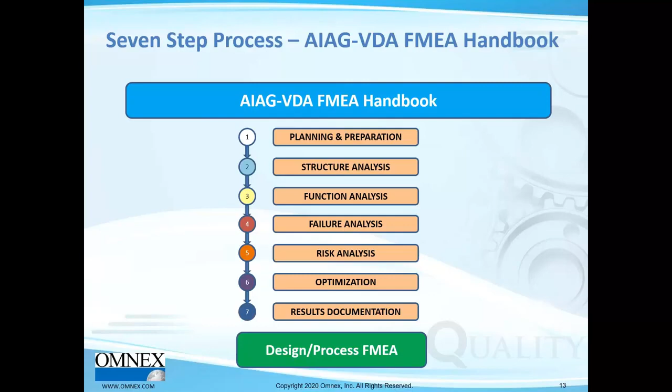And this is the form. The only point I want to make here is that the AIAG VDA is very different from the 4th edition because it connects up the higher level system with something called the focus element, which is in the middle of these threes.

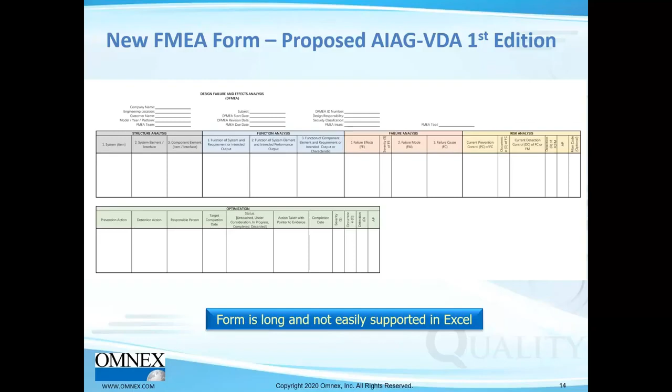You can see colored things here for structure analysis, function analysis, failure analysis. The focus always is on the element in the middle, that system element. The higher level element here is your customer's system, and the lower level element is the component from your supplier. That's an assumption the AIAG VDA makes. Keep that in mind as I talk about this later.

This is the 7-step process with planning, structure analysis, which is the BOM laid out. I always like to remind viewers and listeners, the structure analysis is a very important step when you do 26262, when you do ASPICE, and when you do cybersecurity ISO 21434. The idea, we call it systems engineering, is laying out how the product breaks down. But keep in mind, as soon as you talk EV, AV, we're also talking about the system having hardware and software. Systems are very complicated in automotive - systems have subsystems, sometimes subsystems have sub-subsystems, and you might see software and hardware in multiple levels. It's not as trivialized as some of the examples we do for you.

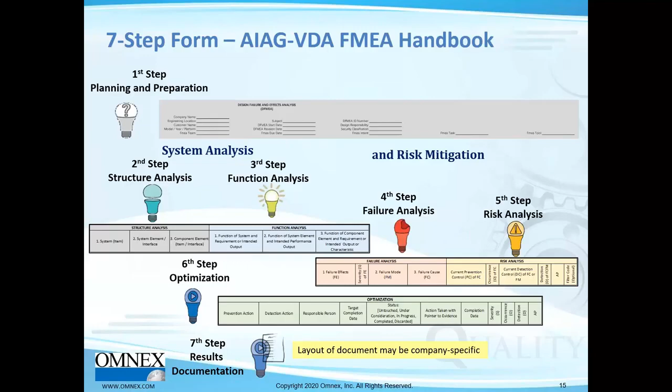And then your function analysis, the idea of functions. Of course, Omnex will say functions and requirements. We standardize to make sure when people do an ASPICE or 26262 or cybersecurity, when you do requirements, we always say do functions and requirements so it's easy to bring into the FMEA. I'll tell you more about that later.

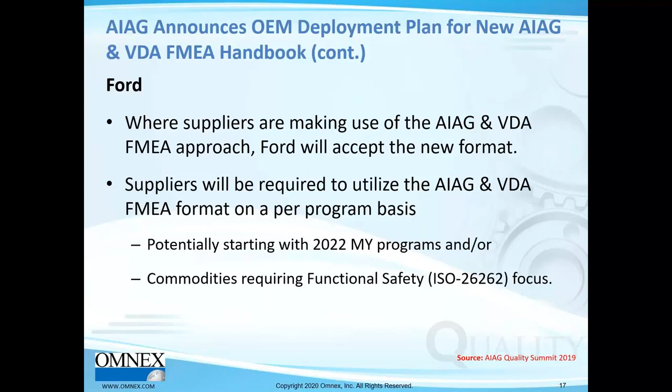General Motors says program starting in 2023, and Mike, that might be almost immediate, if I'm not mistaken. Is that right? Are you actually saying that maybe some DFMEAs have already been completed for 2023? They should be if we're talking about 3 to 4 years prior to a calendar year for the launch. So you'd want to check with GM to make sure what their requirement is for the FMEA.

I would say if you're working on anything that has to do with autonomous vehicles, that you're probably going to get pushed into the new AIAG VDA handbook format.

So I'll also just say the reason I asked Mike is Mr. FMEA, was Mr. FMEA in General Motors. In fact, Mike, would I be mistaken in saying you've even done probably a few hundred software FMEAs?

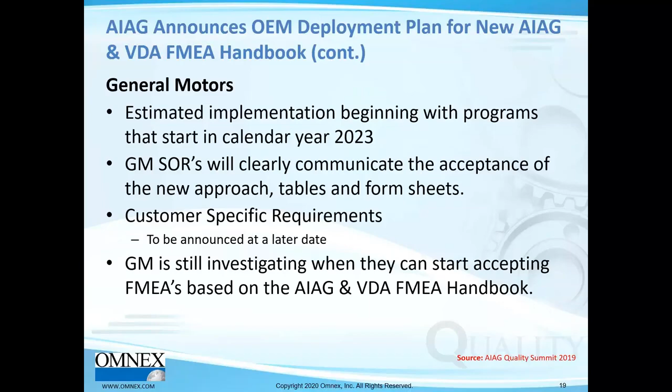You're welcome. So that is sort of the announcements coming from three of the big three and Honda, and just some comments from Omnex. Folks, we absolutely recommend and encourage you to use the AIAG VDA DFMEA. How it links the higher level elements to lower level elements and how you have functions and requirements flow down is an absolute requirement for functional safety.

ASPICE, and cybersecurity. So if you do the 4th edition, you will have to do it outside, using software programs like DOORS or Omnex's flow-down requirements, and then you'll have to transfer it back into the FMEA. So it's very important that you adopt the functions requirements approach in terms of even ASPICE's, what is SYS.2?

I have Nikhil here. Requirements, is requirements elicitation, or is that the one before? Anyway, yeah, one before.

So AIAG VDA FMEA, we have a modified 7-step approach, which I'll share with you in the next few slides. Make sure you use the modified approach so you can get the linkage for the V model.

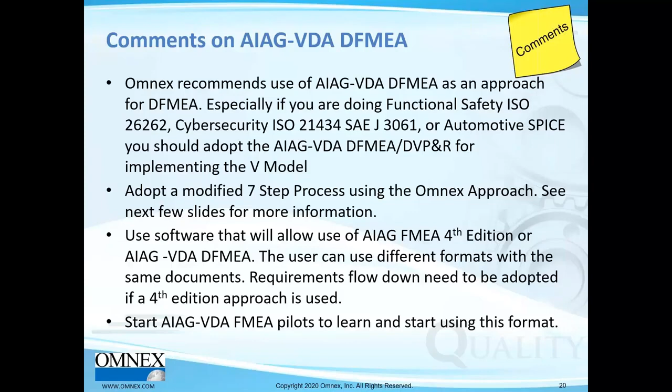All right, next I just want to tell you a little bit, if you don't know and if you're new to the idea of the engineering V, this is what is required, for example, in cybersecurity 26262 or ASPICE. Of course, I don't want to give you all kinds of detail, but this is also where we say, you got to integrate IATF 16949 APQP requirements with these 4.

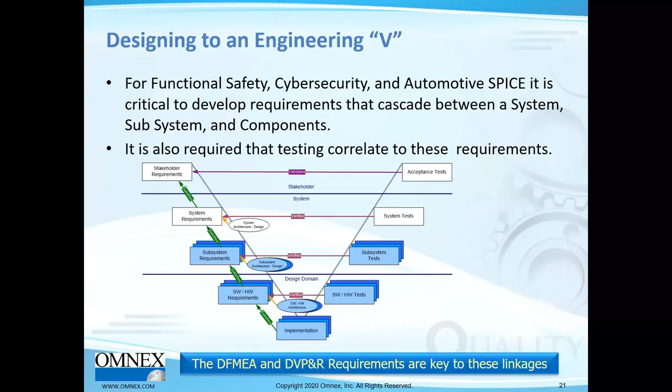But keep in mind, to do something like this, it's not easy if you don't do something like this. This is the engineering V, and a reminder for you, during the functional analysis step of the AIAG VDA, you need to do functions and requirements. Then these functions and requirements, you'll get design, of course you come up with design controls, and test detection methods. You'll have testing, and that transfers into the DVP&R, which is the testing requirements on the right-hand side, okay?

So your test plan or the DVP&R is inherently linked to your DFMEA, just like the PFMEA and the control plan are linked. So, for the longest time, I'll just mention this to you.

Yours truly came up with a linkage between process flow, PFMEA, and control plan in the 1980s. That's how we came up with AQuA Pro, our software, in 1988. We already had it linked. I don't quite remember if I had DFMEA linked at that point, but I spent many years.

I'll just say this, Greg Gruska, also part of Omnex, also came up with the linkage, and he worked with Ford's DCP. So I don't want to claim it just for myself. I spent many 10, 20 years preaching, nobody changed. And then, of course, finally everybody changed. Like that, folks, there's a link between DFMEA and DVP&R.

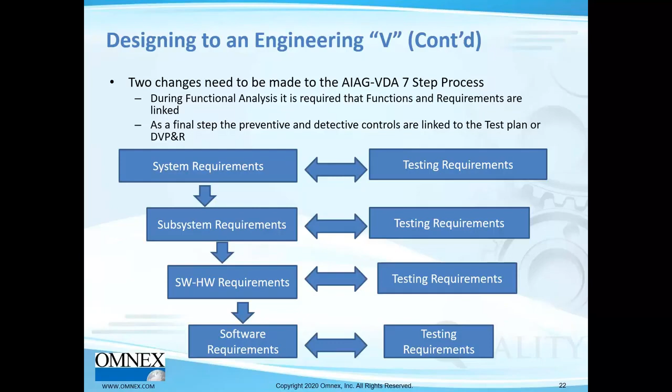Let me just go, I'm afraid to go page down and my arrows don't come. But you got to start at the lowest level of testing, and then you build up. So testing flow, requirements flow down and testing flow up.

This is the modified 7-step approach. You can see here the boundary block diagram, we say it's mandated. And of course, you do the structure analysis and the interface diagram in step 2.

Then in function analysis, functions and requirements is left optional in the handbook. We say functions and requirements, and you'll see later we say functions, requirements. Well, it's there, let me wait.

Then a very big, momentous key thought: because the AIAG VDA FMEA borrowed from the VDA FMEA, they always say the cause of the failure is at the right-hand side, which is at the lower level. So all causes go to your supplier. Customer does the DFMEA, it's the supplier's fault. When the supplier does a DFMEA, it's their supplier's fault.

So causes flow down. One of the things the US methodology is always focused on is the focus level - what can we impact? We can impact our design the most. So Omnex wants to caution: first work on the focus level, which is our product, before we look at causes at the lower level. Look at both.

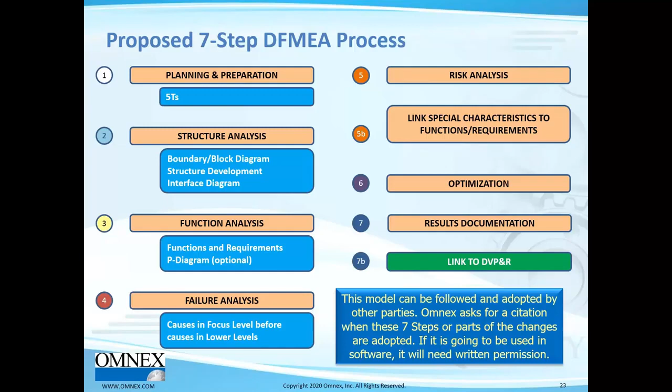Then, of course, you have optimization, results documentation, and you see the 7B that we added in, which is the link to the DVP&R, which is very important. So we recommend you use the Omnex 7-step approach. This model can be followed, adopted. We just say, in my old age, I'd like to get a little credit to use what we develop. Just cite us if you're going to use us in papers and things like that, or presentations.

All right, how about PFMEA? PFMEA, we believe the U.S. does the best in PFMEAs. And we have gotten very close to zero defects in our manufacturing plants.

So when using AIAG VDA PFMEA, we recommend process flow versus structure analysis. It's allowed, it says optional. PFMEA and the control plan approach.

Of course, we stress very much at Omnex the shop floor standardization. You shouldn't stop with the control plan. The key is implementing all these controls at the operator level, preventive maintenance, and so on.

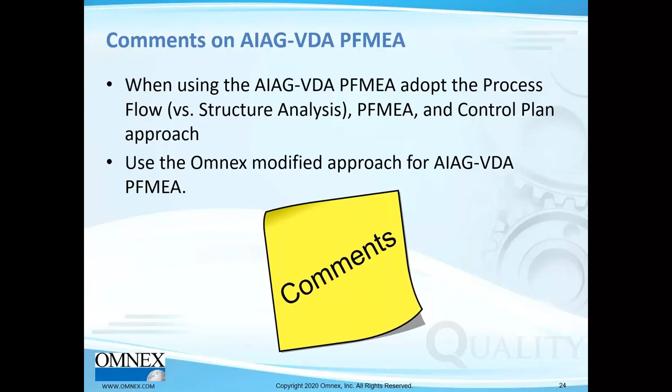And all right, so when we did VDA FMEA, many people talked to us about the reverse FMEA. Since Mike Down is our expert and has written this training, let me just have Mike Down talk a little bit about the AIAG VDA reverse FMEA that you have to do.

Go ahead, Mike. Yeah, because of the concerns that OEMs have now over risk and risk mitigation and control, some of the OEMs will require the reverse FMEA. I would recommend it as something all companies use. What you're basically doing is taking what you've learned from the PFMEA and going to the plant once production has started, going through each operation and verifying that the controls you identified in your PFMEA have the occurrence level or risk level that you assigned to it.

And so it would actually be taking historical data from previous processes and looking at the operation, seeing if the part could be misassembled or put in backwards, or what type of gauging system is being used. And if you put a red rabbit or a test part through, how well it will catch that part and identify it. So once you've done this reverse FMEA, if you learn something about your process, you then put it back into the PFMEA and update the PFMEA.

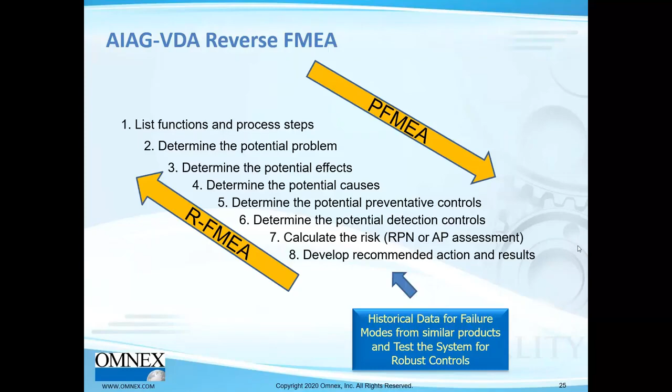So it's a continuous improvement process. You're supposed to be using it to observe any improvements that need to be made. A reverse FMEA isn't restricted to either the standard method or the AIAG handbook PFMEA, because really all you're doing is evaluating what controls have been identified and how effective they are. So it doesn't matter which PFMEA you have. You use the PFMEA as a guide and you identify what the risk is and how good the system is for detecting it. We're working on finishing up a 2-day course in doing reverse FMEA, and it'll be off of the AIAG VDA, but it'll also reference the classical 4th edition.

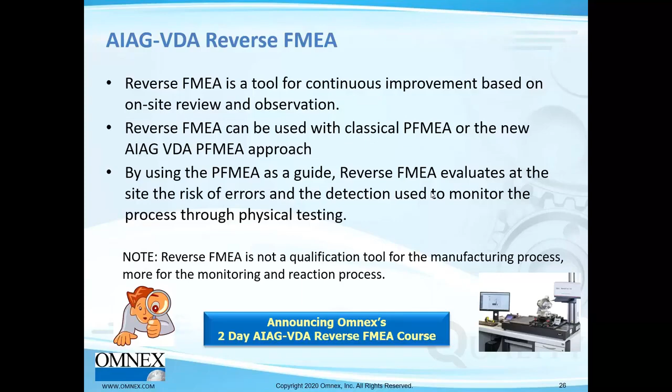So, thank you, Mike. So, folks, the reverse FMEA, which is something GM requires at the start of a new program, on the shop floor.

All right, so that was what we wanted to talk to you about in terms of the AIAG VDA. I'm going to segue now into IATF 16949, but I'll pause and see if you want to ask any questions. I'll mention, based on some of the questions you have asked already, we have not gotten any announcements from the truck OEMs I am connected to. I will try to reach out and maybe fill you in next time I do this, probably in a couple of months, and tell you what their take is on AIAG VDA.

Folks, I'll also mention the linkage between the DFMEA and PFMEA is in 8.5.1.1 in control plan, not 8.5.2 or 8.5.3. Okay, 8.5.1.1. All right, let's now take a look.

We'll start with the FAQs, and then we'll go on to the sanction interpretations.

All right, this is about total productive maintenance. As you may or may not know, I spent 2 years where I talked about the top failures in IATF 16949. TPM continues to be one of those items suppliers are failing in their surveillance also. So questions on what is the intent? Why are you using the word total productive maintenance? Because that's a connotation to a whole TPM program with its different pillars of implementation. And the answer they gave is the term total productive maintenance used in IATF refers to various similar approaches that focus on proactive and preventive techniques. That's the whole idea, and also getting the operators involved in doing TPM. For example, the industry approach for TPM places responsibility for routine maintenance, such as cleaning, lubricating, and inspecting, in the hands of the operator.

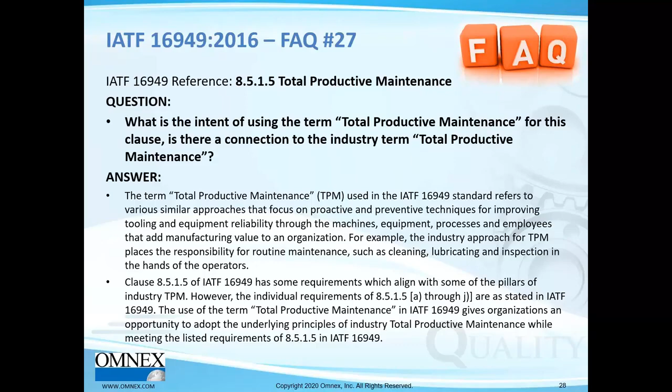Of course, you don't need to do this to satisfy IATF 16949. So here's what they say. Individual requirements A through J are as stated in IATF 16949. The use of the term gives you the opportunity to adopt the underlying principles of TPM. So we do encourage TPM and TPM adoption. I said that, by the way, that's not in the FAQ.

FAQ 28 is about manufacturing process audits, the idea of frequency and coverage. Let me just simplify what they said. What they said is, look, we're not telling you to do every process on a 3-year frequency. 3 years is a minimum and is intended for very low risk and fully compliant manufacturing processes. You should be doing others with higher risk more frequently. So that is what you have in this FAQ.

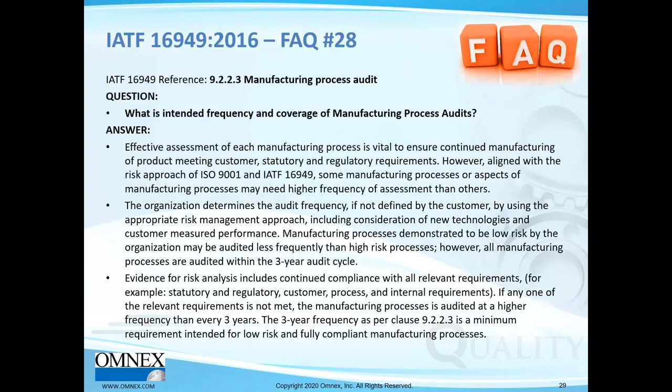Moving on, we have contingency plans. In fact, there's a sanction interpretation, because there's a big part of today that I want to talk to you about, which is, I think, the biggest amount of work we have to do, comes in cybersecurity.

So how did this word cyber attack come in? You will see, I think, I forget what month in 2019. Let me look up my notes here. The IATF introduced in October 2017, they introduced that in the contingency plan, you have to do a simulation of a cyber attack, and you need to consider it. Of course, we, or nobody, really knew what was meant by that, because cyber attack is not a word used commonly. So here is the answer.

A cyber attack is an attempt to gain illegal access to a computer or computer system, causing damage or harm. It's often a deliberate exploitation of weaknesses in security. Don't think about your PC, this is about the enterprise and the network.

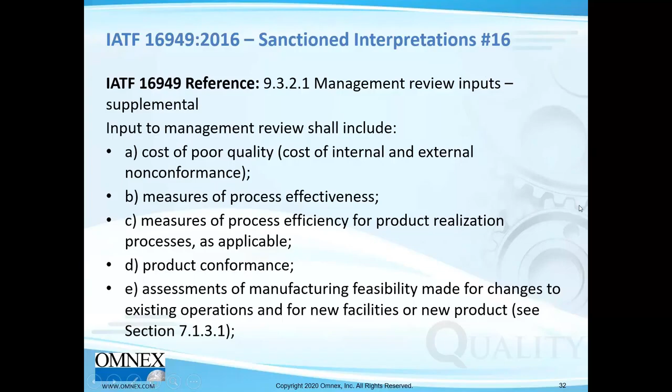So sanction interpretation 16 is just that in the management review inputs, you've got to put something in that's actually in the body of the standard, in 8.3.4.1 monitoring, which is under design and development, 8.3. And they have monitoring of the design.

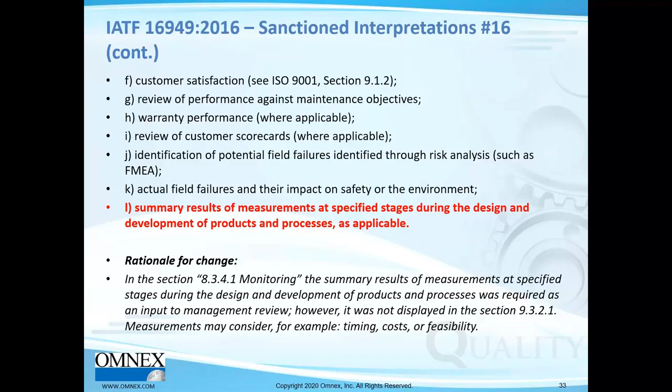So they stated that, but it's not listed in 9.3.2.1, so we need to add that in - a summary of results of measurements at specified stages during the design and development of products and processes. What do we have next? I thought we'd first bring in the sanction interpretation that we had the FAQ on.

That's all it says: cyber attacks on information technology systems was added into the contingency plan. The rationale was the possibility of a cyber attack that could disable the organization's manufacturing and logistics operations, including ransomware. Folks, if somebody went into a key supplier and did a ransomware attack, they could even threaten the OEM, hold them for ransom.

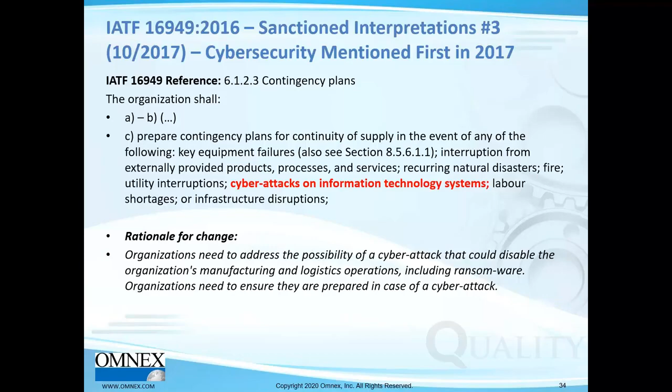And folks, this is real. This is happening to just about everybody around us, so we need to take it very seriously. So here we have sanction interpretation number 17, which says this is what we need to do.

Every so often we'll have to do cybersecurity testing, including a simulation of a cyber attack, regular monitoring of specific threats, identification of dependencies, and prioritization of vulnerabilities - appropriate to the risk. Folks, along with this testing, you need to be thinking about mitigation, which I'll talk to you about.

The rationale is, again, the idea that cybersecurity is a growing risk to the world, especially the US. You've seen the NIST standards, and later on, if I have a webinar coming up just on this topic, you'll see - and I'll quote to you a little bit later - even the SEC has told your board what they need to do.

Let me tell you about that so you can go talk to your top management - this is indeed important, and they've got to understand they shouldn't be doing separate programs for all of this. All of this is part of the same effort. NIST, of course, requires it if you're going to supply the government.

So you need to update your contingency plan, and you'll have to show that you're doing cybersecurity testing. This is not some sort of trivial testing, folks. I'm going to have Anthony John talk to you about that shortly.

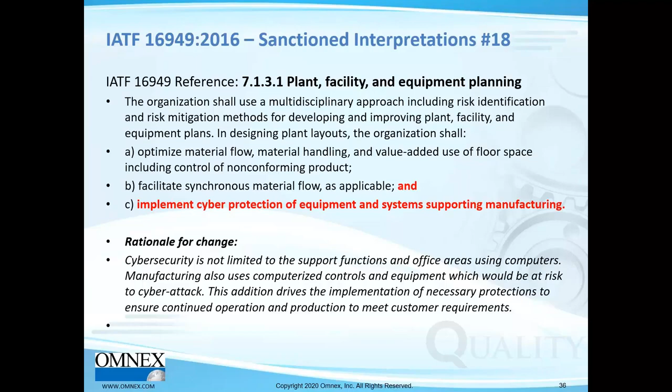I don't know if you're aware of how, using a USB, the US government put a worm into the centrifuge systems of the uranium centrifuges for Iran and made them run so fast they disintegrated. That's the kind of thing that can happen very innocently. If you are compromised, you know, there's much that can happen.

This identification of risk is not a room full of people doing brainstorming. It is the use of sophisticated tools that identify all the vulnerabilities of your system. And then you have to analyze the risk. Once you identify the risks, we use a risk treatment process: analyze the risk, evaluate the risk, and then come up with the risk treatment.

Before I go on to risk treatment, let me tell you what you need to do to identify the risks. Anthony, would you like to talk about the next 3 slides, the 3 types of testing somebody needs to do?

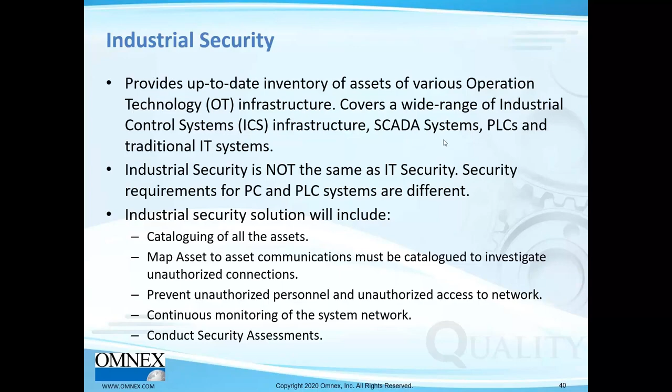Correct, all these securities are important. And Anthony, there are companies who do this, and I think this is something Omnex Systems is also ready to do.

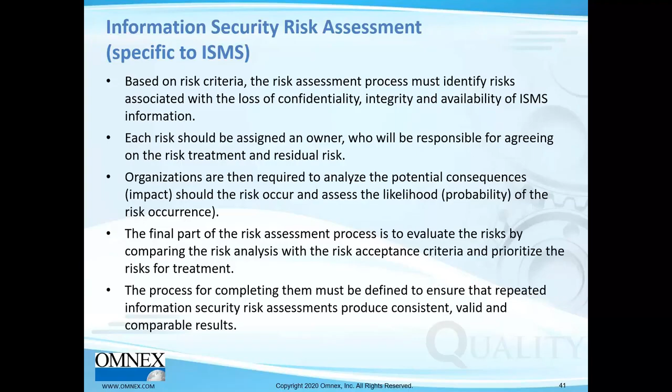It's not just enough to do the risk assessment - once you identify the risk, you need to look at the risk owner, calculate the likelihood and impact, and then do the risk treatment needed. So the idea is looking at overall information security and cybersecurity risk, coming up with a treatment plan and controls, just like we do in manufacturing. You can imagine Omnex uses something very similar to a control plan for cybersecurity and information security.

I did want to mention that the SEC is now requiring top management to make yearly statements and produce a book on the results, and that now needs to include cybersecurity, the SEC says.

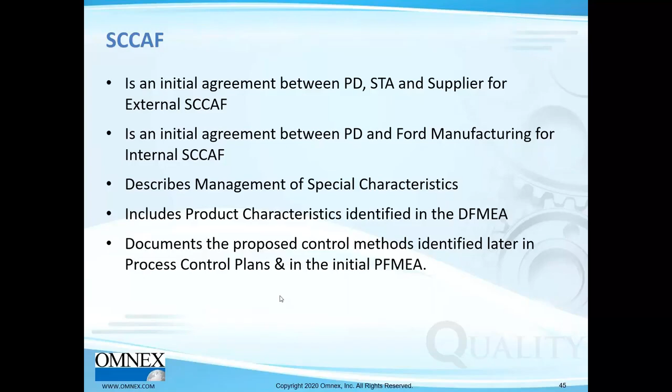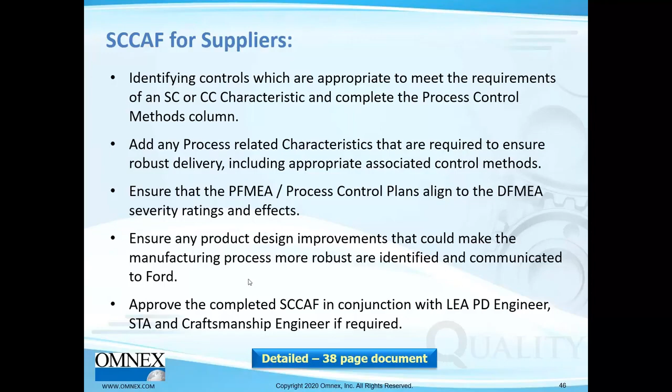So you can see here that the PFMEA and control plan need to align with the DFMEA. I especially want to share with you a little bit later some of the requirements coming from Ford, which are actually quite laudatory.

So here it is. You have to look at the DFMEA, and the DFMEA will have something called YC and YS. These are the critical characteristics from Ford, which includes inverted delta and significant characteristics. I'll show you a flow chart in the next slide, how they treat them differently. And all of that needs to be translated from the DFMEA. If you all know the DFMEA, you know it has no product characteristics. So how do we link product characteristics in the DFMEA? I'll tell you what Ford says, and then I'll add something from the Omnex viewpoint. Then you have to include these characteristics in the process flow, FMEA, and control plan, and then on the shop floor.

Mike, any comments you want to make in terms of SCCAF? It's a very detailed process. It's in addition to some of the requirements already in APQP and PPAP, to really nail down these special characteristics, especially the ones that have to do with functional safety, and understand how you're controlling them and tracking them all the way down through your supply chain.

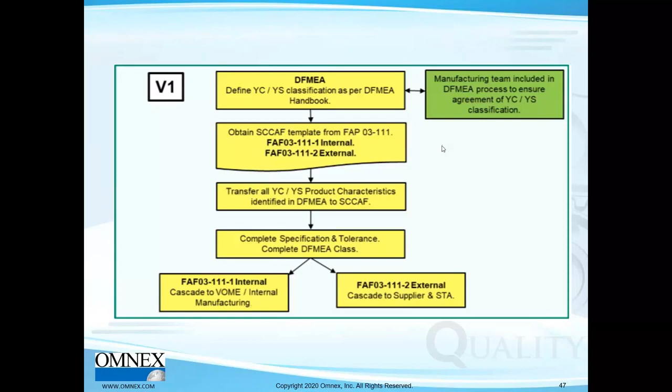Okay, just something here, and I really like this. You can see where the product characteristic comes in. Folks, I want to brag a little bit. I don't know how long ago, 3 or 4 years ago, Omnex started teaching it, and we actually have it already incorporated into our software, linking product characteristics to the cause. But you also have to have one other link, which is functions have requirements, requirements have characteristics. So we do and we teach linkages in both places. Mike, any comments on this?

Not really. Again, it's trying to tie both the DFMEA to PFMEA and lock that down. So it depends on whether the supplier has control over the design or not. If they do, then they're going to have to show this linkage between their own DFMEA to PFMEA. So here's the deal, Mike. DFMEAs don't have product characteristics. You have to do this. Nor does PFMEA have characteristics unless you do something. So what does a supplier need to do in the PFMEA to be able to see product characteristics?

Yes, okay, so this is what we'll have to do. Number one, you have to recognize that the failure mode is a failure mode of characteristics. This is something we taught, Mike, since maybe the mid-90s. We opened up a column called the characteristics column in the PFMEA, and we linked failure modes to the characteristics. It really prevents what we call column switching, where people put a cause in the failure mode.

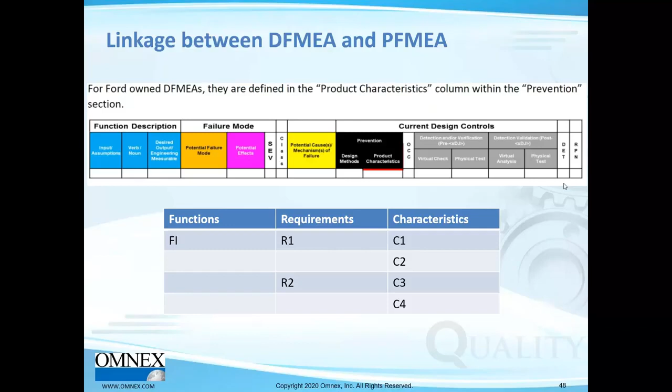But I want you to know, suddenly occurrence comes in. On the manufacturing side, if you have occurrence greater than 3, you need to call it a significant characteristic. I'll also say one thing, Ford dictates pretty much controls for a CC, less for an SC, but you have to put in the appropriate controls.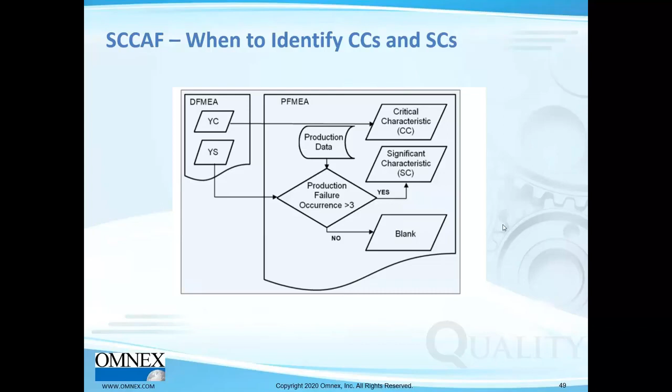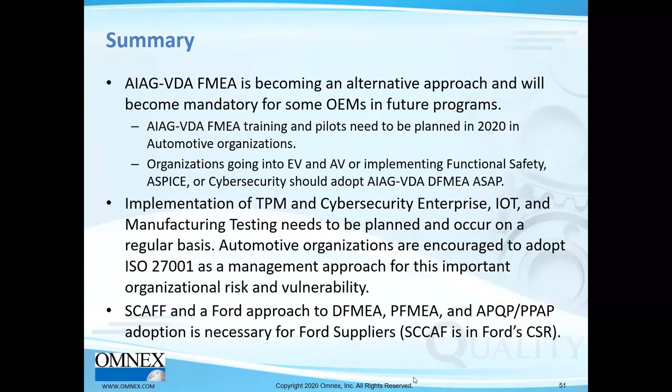Implementation of TPM, cybersecurity, enterprise IoT, and manufacturing testing needs to occur on a regular basis. We are encouraging folks not to use an ad hoc approach, but a management systems approach—implement ISO 27001, a management system that follows something called a high-level structure. And the SCCAF and Ford approach to DFMEA, PFMEA, APQP, and PPAP is necessary for Ford suppliers.

A little bit on our upcoming webinars. You can see we have really good, different free webinars, and of course some of the training books I have written, and some of the training we have at Omnex.

Let's go and answer some of the questions we have. I'm going to give this to you, Mike. Please explain a little bit more about the updating process of FMEAs—actions recommended, M and H status. It's a little hard to make out because it's in Spanish, so I don't know if you can make out the question. If not, I'll go to a different one. I'm not sure what he's asking. Let me just go on here. I think this one was already answered, Joseph.

I'll have Anthony just say, what about IoT devices and smart IoT? I thought that's the IoT security—maybe there was another slide. I think this may have been an earlier question before we talked about IoT testing also.